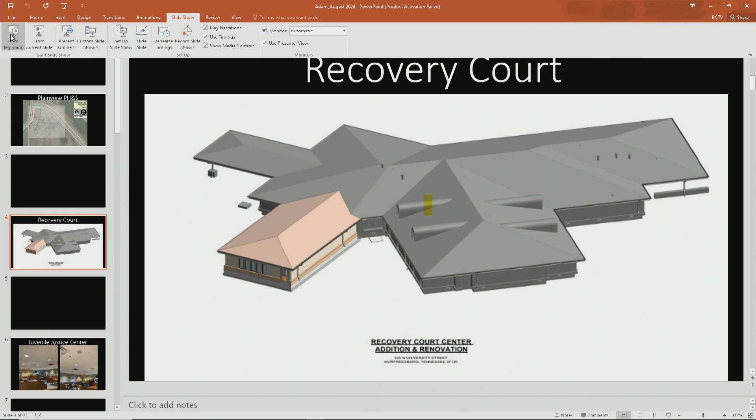The architect has received a confirmation and acceptance letter from FTM confirming their bid amount. The architect will follow up within the next 2 to 4 weeks with permitting and a potential construction schedule. That completes my report on the Recovery Court Center.

Any questions on Recovery Court? Commissioner Irvin? Proceed on.

The Juvenile Justice Center: the jail cell restorations were completed on August 8th, 2024. The curing process per manufacturer's recommendations expires tomorrow, August 30th.

The juvenile administrative staff are aware of this timeline and are scheduled to begin full operations, as well as the ability to occupy that entire space without restrictions.

Juvenile Courtroom B, the ceiling tile installation is now complete. This will close the report on the Juvenile Justice Center related to our site visit 3 months ago.

Any questions for Adam? Commissioner Davidson? I don't have a question, I just wanted to say thank you, and it looks very nice. We appreciate you, thank you, Commissioner.

We'll move forward. The contract with the recycling center renovation: the contractor made a lot of progress over the last 4 weeks. This project is now approximately 70% complete.

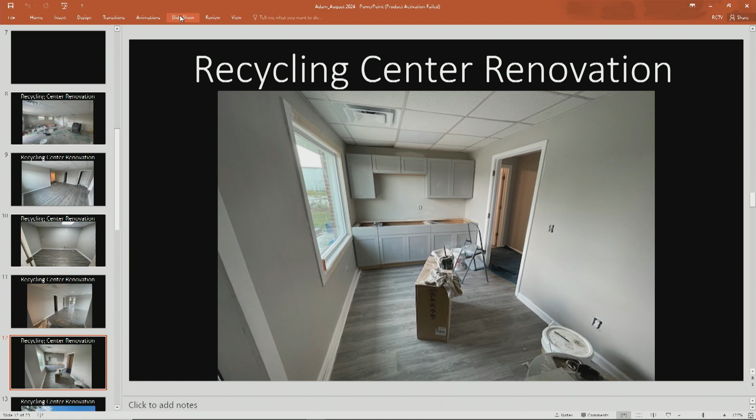Chairman, just before you leave, you may be coming back after Bishop, but Laura mentioned how good these buildings look, but also the Singer Road property looks great. It got mowed after our concerns of driving by it, and I drove by a few days ago, and part of it was done, and then I went by again this morning, and it looks great. So thank you for that effort.

And I think Mr. Jeff Pate was your bush hogger? Correct, he was. We contacted him and expressed the urgency, and he was more than happy to work with the county to move his schedule around to get out there and do an excellent job.

Depending on the decisions made from the previous presentation, regardless, as long as the county owns that property, we will do this on a recurring schedule. We'll probably look to cut this property in the spring and in the fall each year until a decision is made.

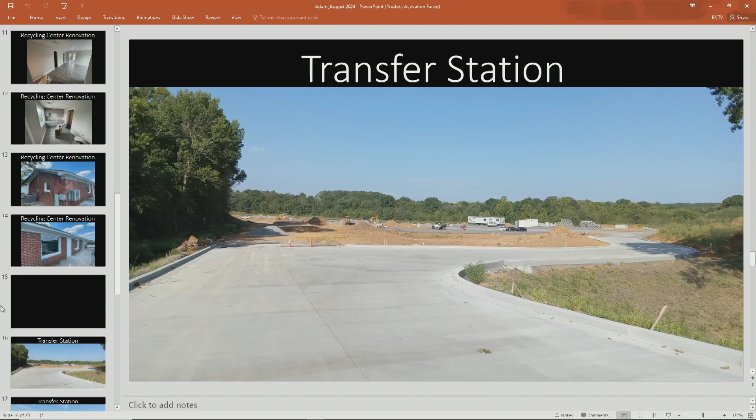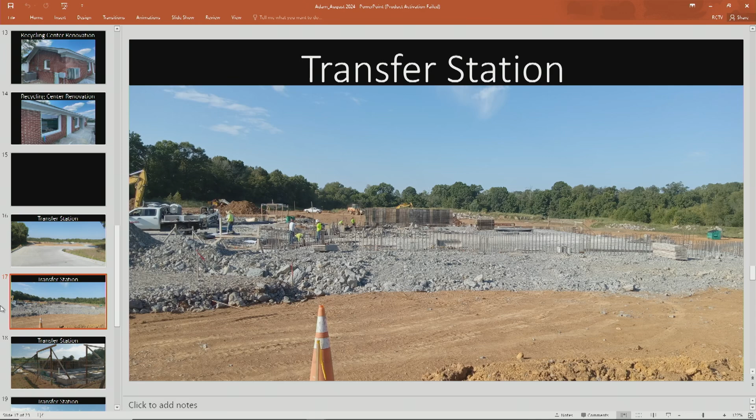Another shot of the footers in particular. Those footers are 2 feet thick. They are heavily reinforced with rebar.

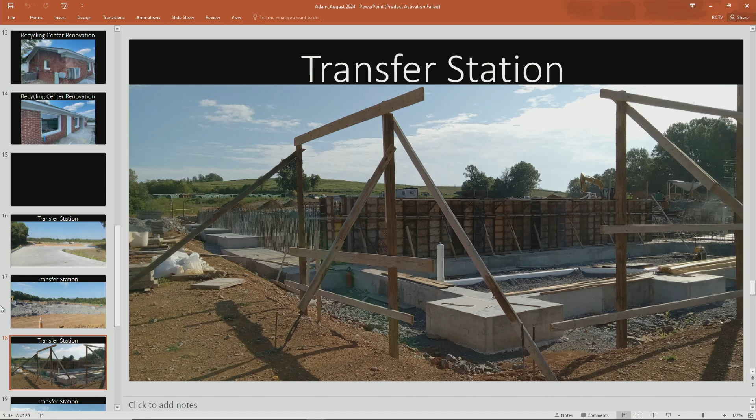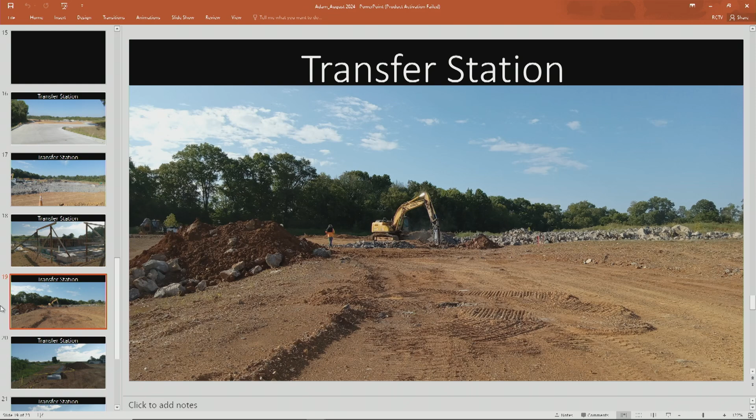A shot of the site work being done out there. They're currently in the midst of putting in the concrete storm pipe and some of the storm structures. There's another shot of the storm structures on the line.

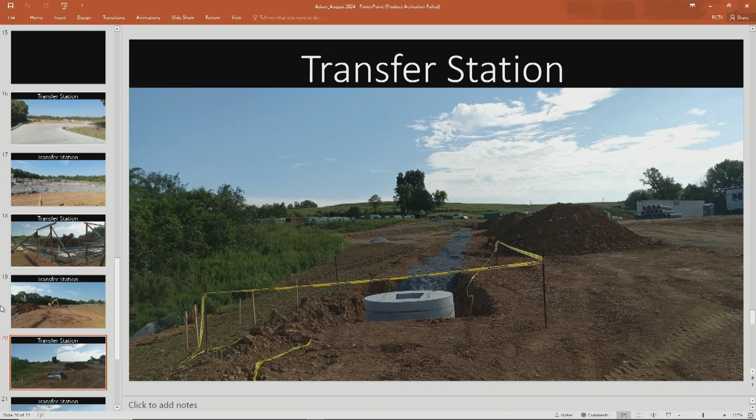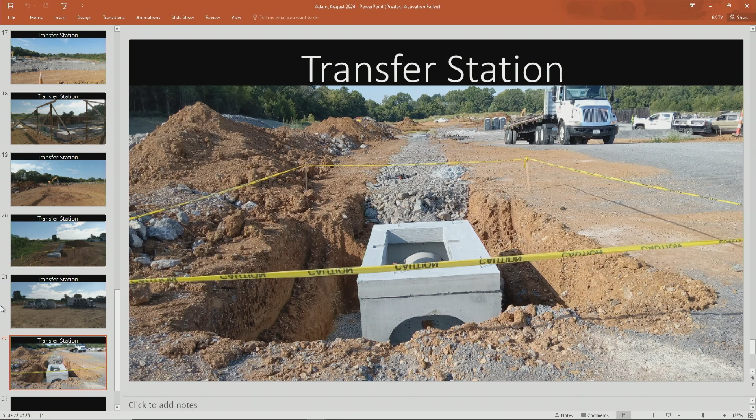This isn't actually my presentation. I had one that I'd provided. I don't know, those are really nice pictures though. I know that place, it's a pretty nice place. There's my presentation, okay.

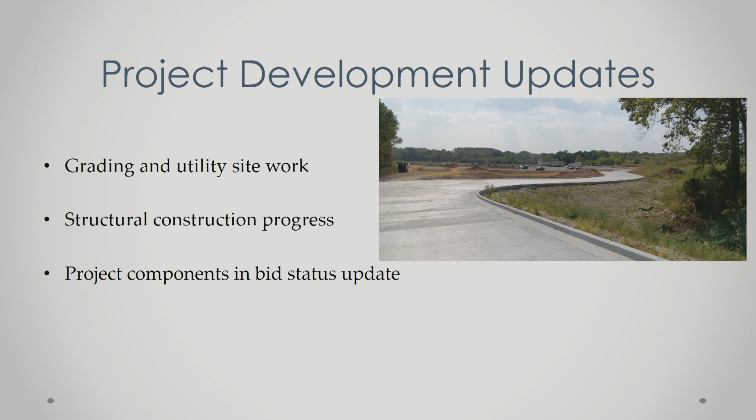So now that we've seen the pictures, let's look at what the site's supposed to look like. We're going to talk about the grading and utility site work, the structural construction progress, the project components, and the bid status update.

Here is the transfer station overview, a conceptual view of the site. If you look up to the northeast corner, when we saw that first image earlier of the concrete and us coming in, that's as if you're standing there looking down on the site.

The scale building is in the center of the image, next to the river, and traffic will drive up to it. Trucks will be weighed in on one side and weighed out on the other, then turn right into a heavy-duty concrete area before disposing of their waste within the building.

To the northeast of the transfer station building is a 1,200 square foot office building, also a structure as part of the project. At the southern part of the picture, there's a fueling station that will be utilized just for Rutherford County solid waste vehicles, with 8,000 gallon capacity.

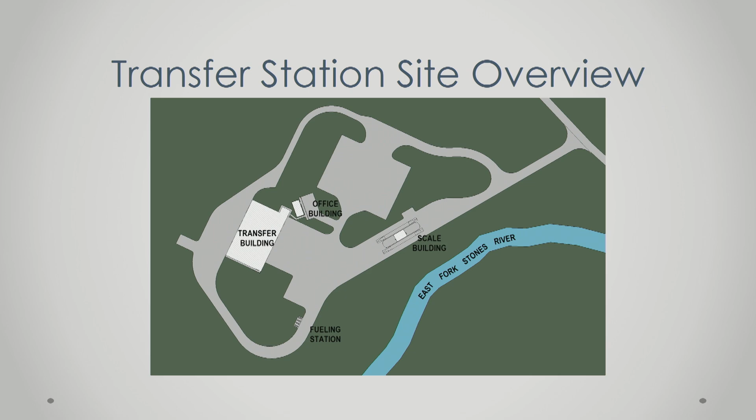Here's a more detailed plan-style drawing of the same image. The area in the center with the big lines is truck parking, for trailer parking or trailer storage. The area toward the northwest with the diagonal lines is future gravel area—there's not going to be lined parking there, just something set aside for future expansion if needed.

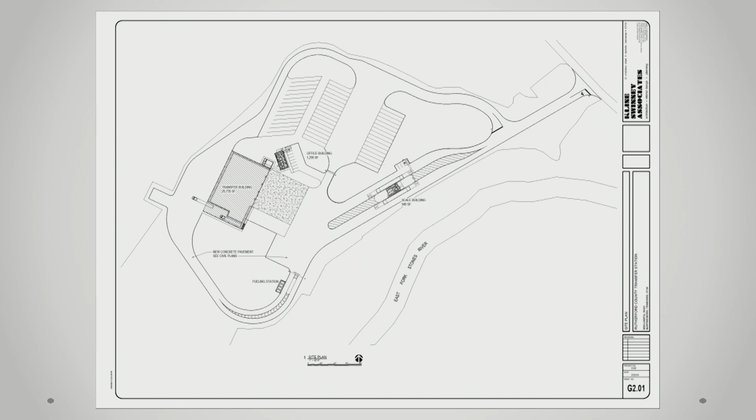Here is the design plan overview of the transfer station as designed, along with a conceptual rendition of what it'll look like when completed. This is a two-bay station with two load bays. One is designed to have a compactor setup where they compact garbage into tube receivers, and the other is an open top for 53-foot open trailers to be loaded on the other side.

The transfer station is about 14 feet from the wall at the top to the bottom of the base where material is loaded. There are 5 entrance bays at the south of the facility where trucks will enter, dump, and exit, with heavily reinforced columns in the center.

That little area to the right has restroom facilities, a pump house for the fire suppression and related equipment, and a room for all the electronics.

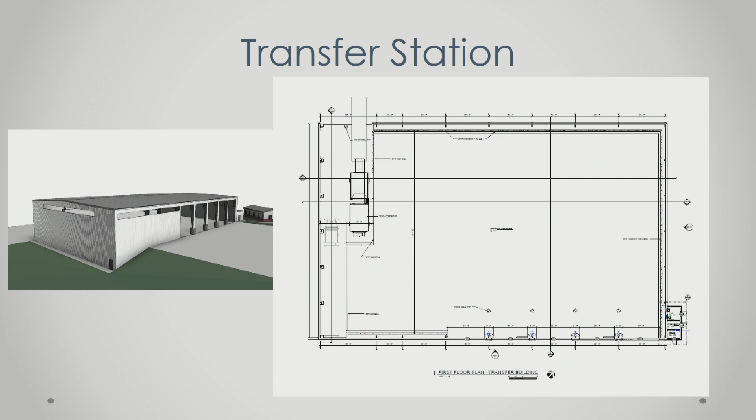This is the floor plan of the office building. It will have 3 offices, a reception area, 2 bathrooms, and a training/break area in the back, at 1,200 square feet.

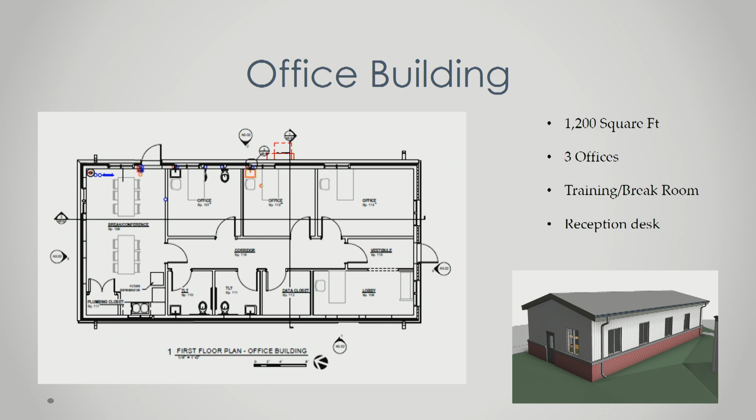This is the scale house building, which will have scales located on either side of it. The little window is as if you're coming onto the scales—there will be a kiosk where people with accounts with the county can key in their number or use a card, depending on how they're set up. Then they go over the scales, the trucks are weighed, and they go in to do their dump. They'll come back over, and if we don't have tare weight on the vehicle, they'll weigh out. If we do have tare weight, they can bypass the exit scale because we'll know the vehicle's weight. Then they're charged based on the weight of the waste disposed of.

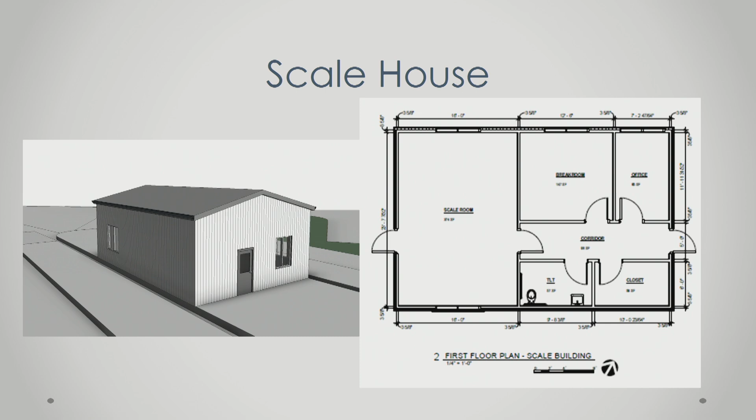So here are the to-dates. The bid for this project has 2 of 4 components. Right now, the 2 components that have been bid out and contracted are the site work and the structural work. Moody Construction is doing the site work; their original bid is $5,377,730.

The pay application data from August 9th shows $1,717,608.11 has been paid out so far. It's a little higher than that now—I've got an update from Michael after I created this. It's less than $2 million right now.

Boyce Ballard Construction is the one actually putting the transfer station together. Their original bid was $7,330,000, and to date they've had a payout of $406,000 on the project.

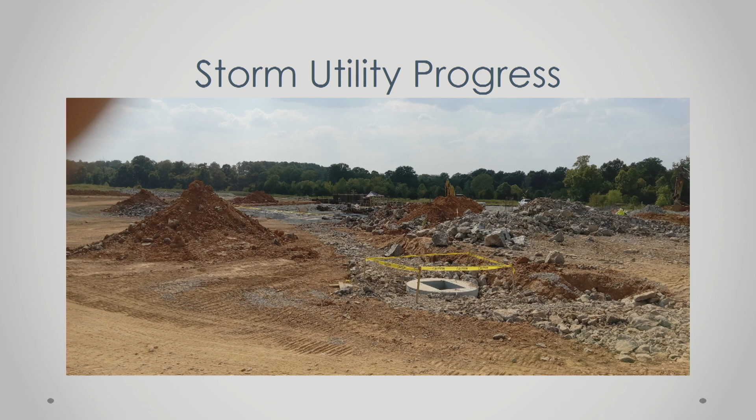So this is the status of our active bids. On August 27th, the bids were received for the landfill road improvement, and they'll be under advisement until September 10th. Then for the utility connection project, the pre-construction meeting was held on the 27th at my office, and those bids are scheduled to be received, I believe at 2 o'clock on September 10th. Any questions?

Commissioner Phillips? Bishop, can you explain the relationship between the engineering part of this and our planning department? Did they have any input as far as the engineering, design, floodwaters, retention ponds, those kind of things?

Who did all that? So the engineering and site design was done primarily by SEC Engineering. However, they're in contact with our planning and engineering department every step of the way. We have monthly update meetings with both the architects and the site work. We actually have representation from planning and engineering that goes out and oversees the site work from Mike Hughes' office. So yeah, we're in communication, and they're with us every step of the way as we go. Outstanding, thank you.